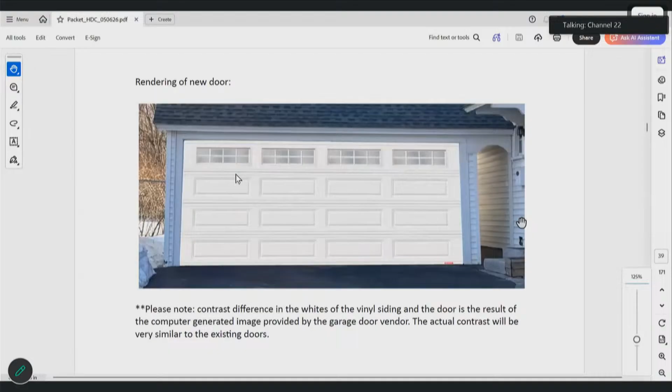Is there a motion to approve or deny? I'll make a motion to approve, get some conversation started. A second, please. Second. And discussion.

Well, I would say that it does look less historic with one long big door, but at the end of the day, it is a garage. So as much as I'm not crazy about the change, I think it's a less historic change. I'm going to accept and support the approval.

Yes, David. I don't have much of an opinion about overhead garage doors. They're a difficult thing, I've struggled for years trying to blend them into period buildings. But I think the repeated small window at the top gives this another character that moves it into another position. I'm wondering if they could just put 4 solid panels in each frame - without that, I think it would be plain. It would be missing the centerpiece, but I think painted out, it wouldn't bring you right to the focus of what that is. It's just a thought, trying to find a place.

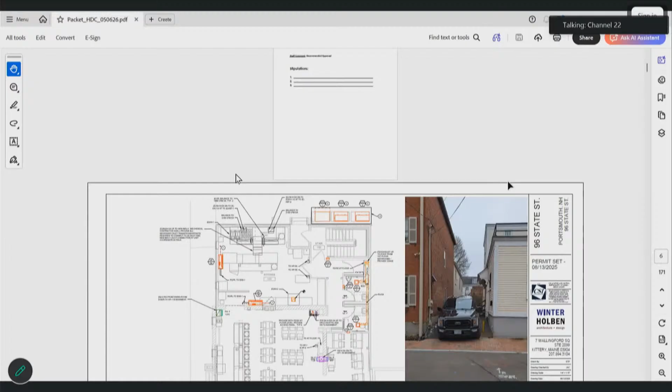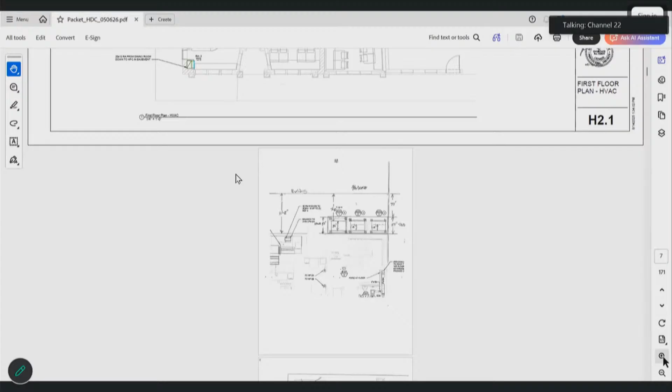We will start back at the top with item number 1, 96 State Street. The applicants are looking to install 3 exterior HVAC condensers on the building. The photo shown is the tight parking alleyway area where the condensers will be located, behind where the truck is standing and on the other side of the stair rails. They're located here in red, and there's also a schematic showing where those will be located and the sizing.

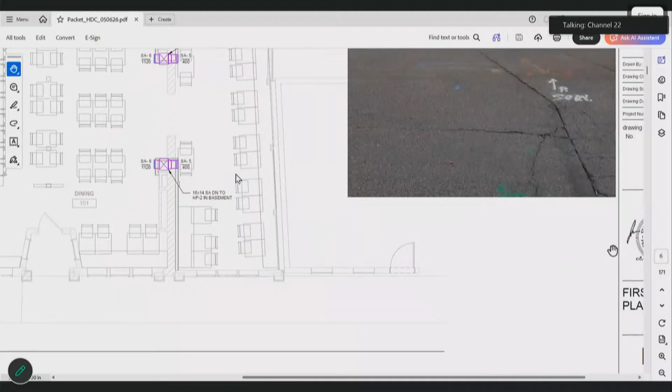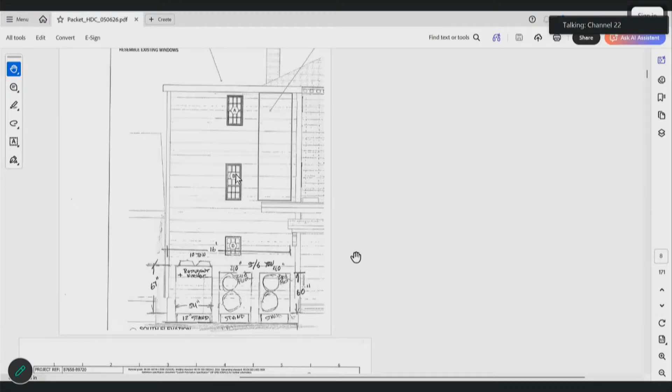I'm sorry, Isaac, I couldn't make heads or tails out of this schematic, could you go over it again? I walked around and couldn't figure it out. So if I'm looking at it correctly, from this photo where the railings are for this exit behind the bed of the truck, that would be the location for the 3 condensers on the snow stands. So behind the stairs? Exactly. I believe that's what we're looking at on this page. It does appear the line sets will run on the interior, with no exterior line sets shown. That's what I couldn't figure out, how it gets around the corner. Okay, that makes more sense.

Have they designated what type of screening they're going to use? They did not have screening proposed in this application. I'm not sure if the applicant is open to suggestions, or if we could stipulate that they use one of our standardized wood screening options. That could be a stipulation. Okay, any other questions on it?

We will move along to item number 2, 254 Newcastle Avenue. This project is here for the installation of an exterior condenser and exterior line sets. There were some questions from the commission last month, so I reached out to the applicant. We have a somewhat updated proposal from the HVAC company, and the applicant is here in case we have further questions. As noted, the condenser will be hidden at the rear of the home behind fencing, so that will not be visible from the street.

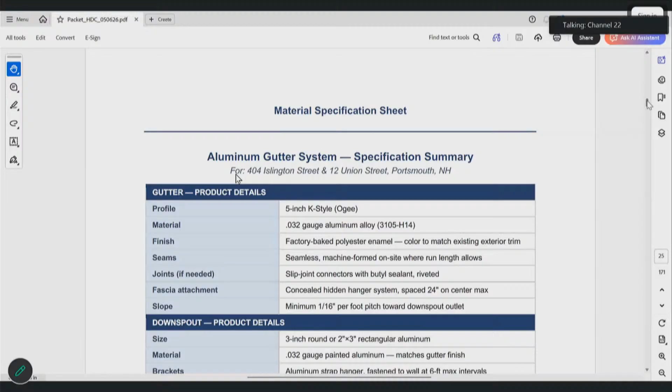My Photo 7, my guess is that it would be a similar style. I'm not sure if the applicant is here to confirm or deny. I will see if there's an actual spec here that might show that. It does say it would be replaced. The first page says this failed and is going to be replaced. So to answer your question, it would all match, it'd all be brand new.

I would just like to ask Isaac, do you remember if we approved the line sets for these condensers? Because unless I missed a meeting, I do not think I would have approved line sets like this for this building. Does anybody else have memory of this? And I certainly don't think we would have allowed it without telling them to paint the body of the house.

I don't recall line sets. I'm happy to look back and check the application materials from the recent past. And if that's something that we need to have the applicant come back for, even just to paint it to match, we can do that.

I'm not going to approve this. If we didn't approve these and this person went ahead and put these things in, I think we should hold up on approval of these gutters because they're proceeding in a way that they're not supposed to. I'm not saying I don't support the gutters, but I think we need to get this property back to proper procedure. Is there any representative from the property here?

Doesn't look like it. I'm not sure procedurally how we can hold it up, because the line set request is not part of this request. But it is something that Isaac can go back and research. Yes, absolutely.

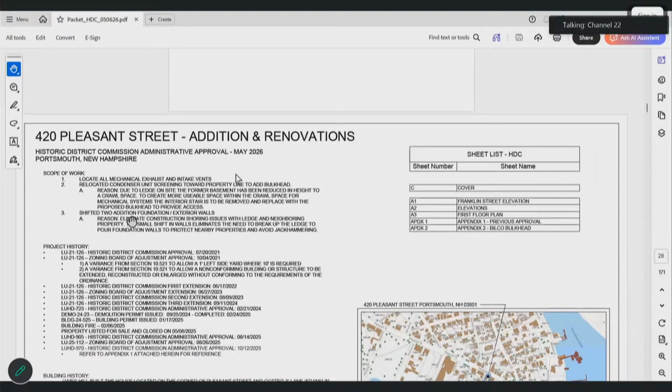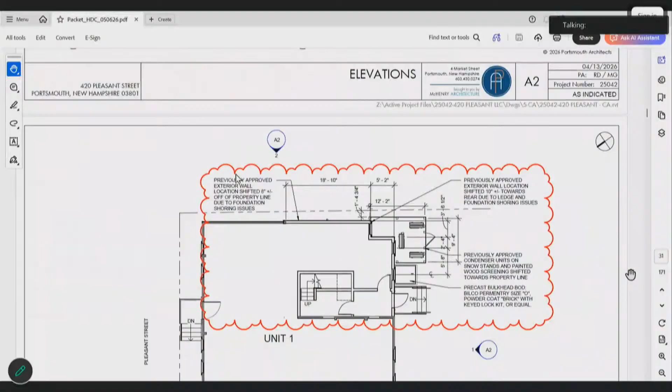They also had to shift the addition foundation exterior walls slightly, so we will see those minor changes. Here's some of the mechanical venting they will need, including some roof exhausts on the rear. This shows how the exterior foundation walls have slightly changed, where the bulkhead would be proposed, and the relocated condenser screening.

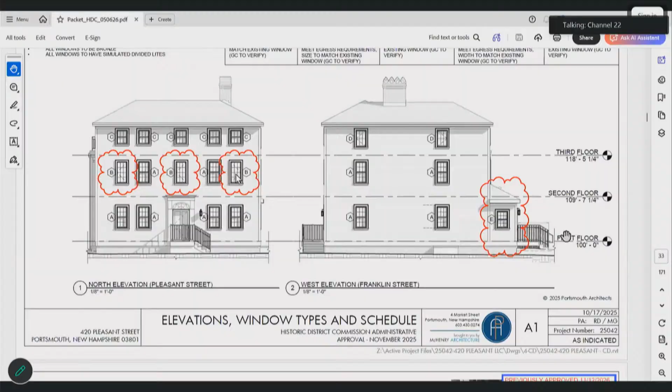We have our list of materials that have been coming along with this property, including the previously approved screening. They're just showing that it was already there, and they'll use that same style.

Just a quick question - it says previously approved November of this year. I think that might have been a typo, supposed to be 11/12 of 25. Not time traveling.

Any questions on these minor modifications and mechanical exhausts and vents? I have one I can't make work in my head - the Franklin Street elevation shows exhaust intake, which by itself is not an issue, but that's right where their electrical entrance runs. There's a pole very near there, and the wires run directly to the house and then drape down.

Are they going to have both there at the same place, or are they going to move the wires? That's something I don't know, and I don't know that they actually have to ask us about that. Just saying, it doesn't make sense - it's nicely centered between the windows, but I don't know that it makes sense. I don't think it's going to change anything otherwise. Okay, any other questions?

We will move along to item number 6, 235 Marcy Street. The applicant here was before us previously for a full renovation and addition project. The proposal this time would be to add solar panels to the roof and also snow guards.

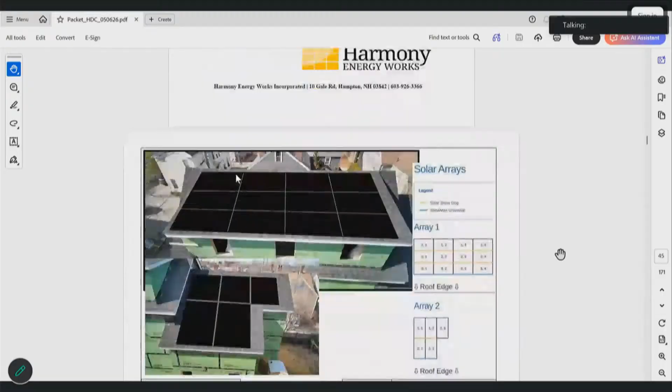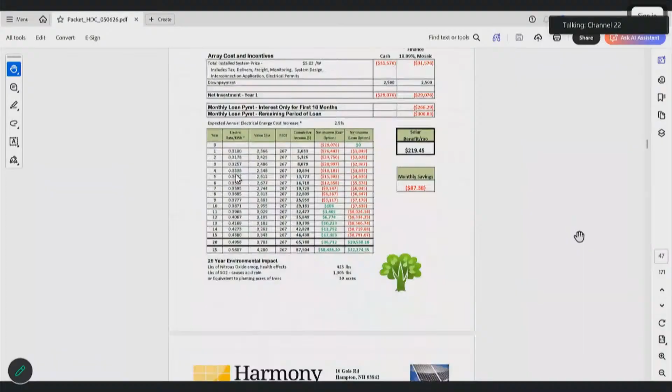As you can see, they would like to add solar to the top shed dormer and then onto the new rear addition roof line, covering the majority of that. Further down, we have some examples of what that would look like from more of a street view.

From the street, you would see a few panels on the lower rear addition from the back. The roof panels on the dormer on the 3rd floor would be very minimally visible - you would maybe see the edges, not a full panel. You would probably also barely notice the snow guards proposed here.

If need be, we can always stipulate that any conduit lines, electrical or mechanical, be run directly through into the house and not be exterior. Given the state of the house, that's probably a great thing to ask.

Any questions or concerns with this one? In the future, it'd be nice to have a view from the sidewalk, lower, because it's really hard to tell from this perspective. Sure, agreed.

The roof of the rear addition is clearly visible as you go past, and if you're walking slowly, you will have a clear view. If you're driving past, probably less so. So it's a little more than minimally visible, but not much. That's of course why it came to us for an admin approval - this did not meet our exemption.

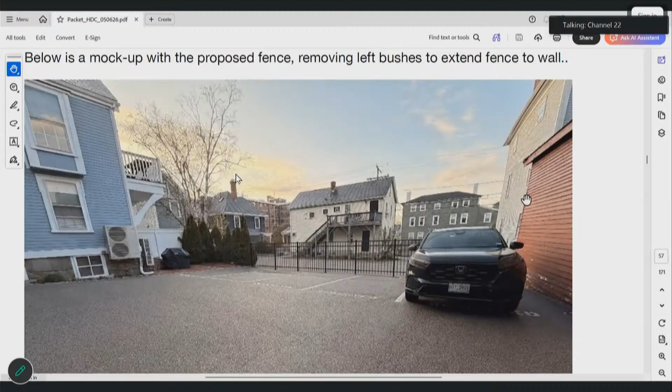We're getting some vagrant activity back there, and we also had a middle school fight scheduled back there a few weeks ago. They get out of school in the middle of the day on Wednesdays, and I came out to a full-on fight in the backyard. We've also had vagrant people crouch down and hide back there. It's the perfect place to not be seen by the police, and then they can run off if someone tells them to leave. If we have the fence up, there's no reason to go back there and try to cut through.

The fence will match the front fence as much as I can. We have a front gate that you can enter through for the driveway, and it always stays open. I believe that is original with the property, which was built in the early 1800s, anywhere from 1813 to 1825. So this will match that as much as possible.

The other properties that way don't need it because there's a house that works as a natural barrier, but all of the houses going towards Middle have fences in the back, very ugly fences. Ours will be beautiful.

Height? How tall do you want it? I'm going to check with the fence company, but I believe it has to be at least 5 feet. I don't want to go 6 feet unless I have to. I'm going to make sure there are no horizontal pieces anyone could get their foot in to climb. If the vertical pieces are no more than 4 inches apart, I'm told you can't get your foot in there to climb it, even if there are horizontal pieces along the vertical pieces.

And black, definitely black. With this type of fence, Isaac will probably remember the first awful rendering I sent, which was just a terrible continuation of the white fence. It looked really bad, even though it would probably be a lot cheaper. It looked terrible, so that's why I switched it to this.

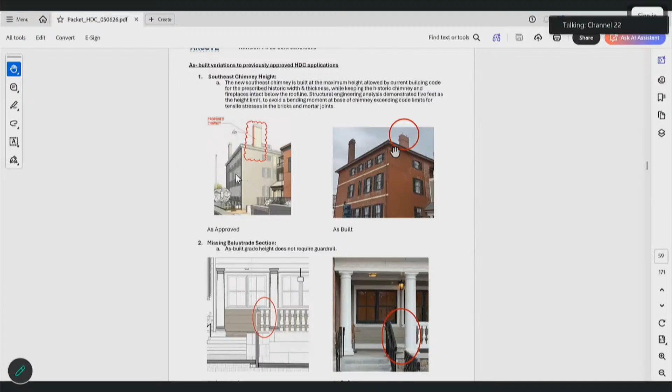There's a missing balustrade section, and shorter crown moldings on the porch and entablatures, and cap moldings over the window heads were omitted—we'll see those here. As you can see, the new chimney is quite a bit shorter, again due to the height restriction on chimneys. I believe the applicant is here; if anyone has further questions on the building or inspection side, they might be able to answer why those height restrictions are in place now.

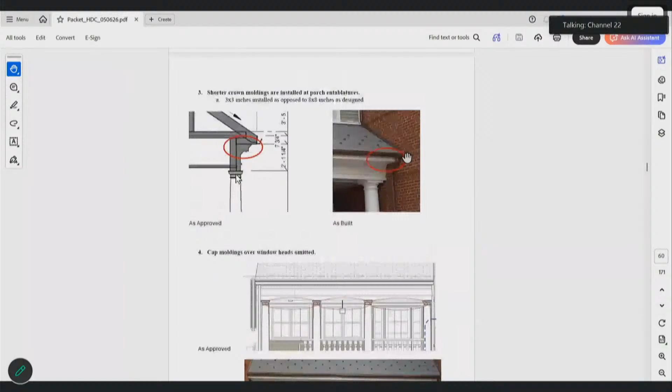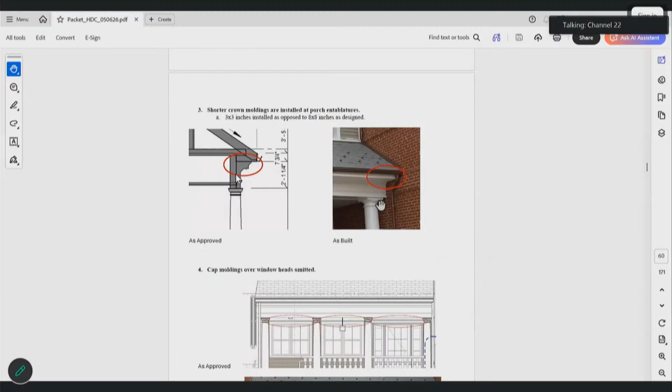As you can see here, this was the previously approved balustrade section. The as-built is missing just that one tiny section from the railing over to the column. This graphic shows that the shorter crown moldings were installed at the porch and entablatures, as mentioned, calling out the previously approved versus the as-built, and similarly with the cap moldings over the window heads that were omitted.

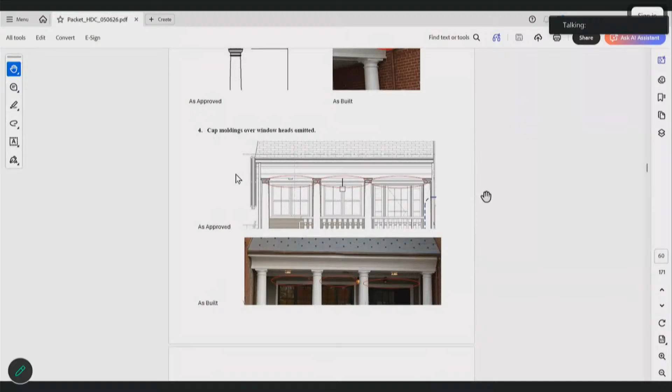So we are approving the omissions. Yeah.

Any specific questions on any of those individual items or with this application as a whole?

Just wanted to thank Tracy for how well she lays things out for us to see. Thank you.

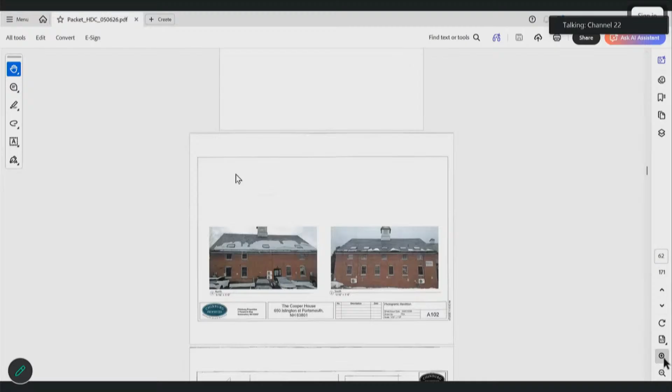Okay, with that we will move right along to item number 9, which is 650 Islington Street, Unit C2. The proposal here is for exterior HVAC equipment, multiple condensers, exterior condensers. You can see here on the plan, they show a total of 4 condensers.

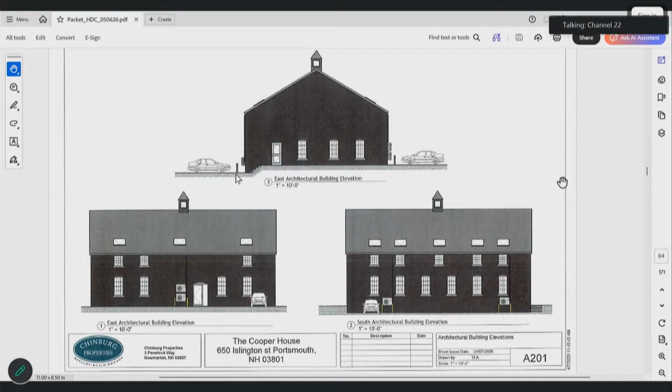These will be on snow stands, it looks like, and will be visible from the parking lot area. If you're driving by, you might not notice it so much with cars parked there, but certainly if you're walking around the building, these will be noticeable. It looks like they are proposing vertical exterior line sets. They are very difficult to see, my apologies, but you can see there's a vertical line running from each of the 3 condenser spots, running straight up to the 2nd floor level.

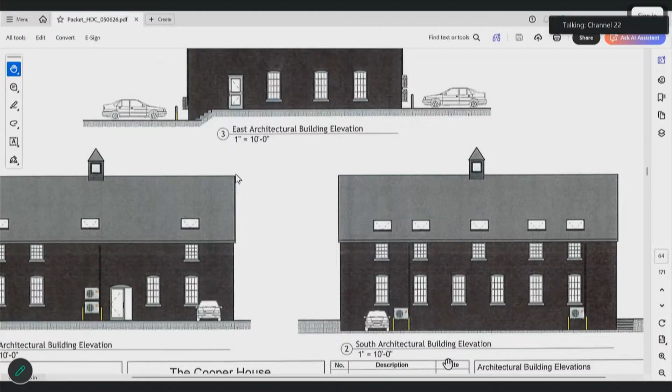My assumption is, based on the coloring, that they would be open to painting it to match the brick as much as possible. Are they proposing any screening? Screening was not part of this application. I would think that they would be open to screening options. We can always stipulate one of our wood screening options if that's appropriate. Even if the wood is painted a brick color or something, I don't know if it's too much.

Is there anyone here to speak to this property? I would love to know if the proximity to the parking spaces is going to be a problem with putting screening in there. Well, it looks like there might be some sort of parking balustrades, or at least they might show that that's where cars can park up to, so they may have room to do that.

We can stipulate that if they can't do that for that reason, then they can come back to us.

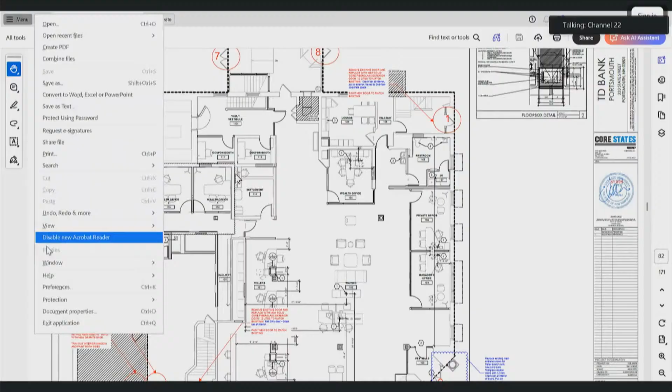Is there anyone here for this application? Hi, please come introduce yourself. Good evening, my name is Thomas Michael. I am Senior Manager of Development in New England for TD Bank. Great, welcome, thank you. Isaac can put up your application on the screen, and if you would like to take us through what you'd like to do.

As the board probably is aware, we've had somewhat of a continual renovation going on in this building for the past, I'll say, 3 years. It's kind of like an old sweater, pull a thread, and we're finding additional things.

The application tonight is for the replacement of our exterior doors and the removal. The application says removal of 4 doors and converting to a window. I think it's only 2. The person who submitted the application did note there were some minor revisions on this iteration.

So the reason this is coming up now, we've done renovation of our retail space and added some other additional spaces. Through those renovations, we've identified that we want to upgrade our security system on the building. Part of that is the doors, which are very old wooden doors, kind of worn out, and they don't close well. So we want to replace them with composite doors, similar looking, similar color, similar window style, so that they have a secure closing and our alarm system won't falsely trigger.

Okay. Is that it? Do you want to scroll through and see which ones we're talking about? It looks, so—

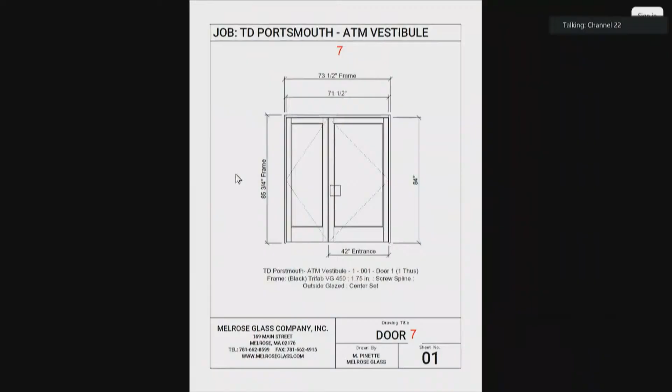And then if you go back, I think door 8 is on the parking lot. Yeah, that door is non-functioning, doesn't serve a purpose, so we're proposing to take it out and put a bank of windows in that match the windows to the left.

Okay, so that's not what is in the application, so this is why it's very confusing. I don't know if you got any updates from them? I might have misspoke. Door 8, if this is door 8, I'm not sure the numbering of the doors in the application. That door is being replaced in kind.

Similar style, similar look. Okay, so for door 7 and 8 in this application, it looks like you want to replace them with metal frame doors and full light, so that's why it's not what you're presenting. I think our architect was proposing full light versus half light. I think that was a big discussion we had back and forth. So we might have received a previous design. So it sounds like—

All the current doors will be replaced in kind, matching design, but maybe not all wood. They will not be wood. They'll be a composite door, so we don't have the degradation issues we have now. Right, okay.

Are there any other questions? Do you have cut sheets of these composite doors, Christian, do we? We have shop drawings of the two back doors we just spoke about, but not in this presentation. Not in this presentation, no. Okay.

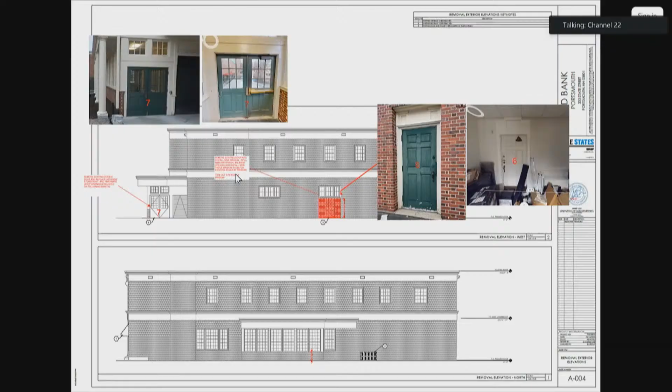All right, are there any other questions about this? Yeah, let me get Larry. Just a couple comments. One on the door material, because at one point we mentioned wood, composite, aluminum.

I think at the end of the day, you are a bank, so you have to go with whatever makes you most secure in your assessment. But I do have a question here back on door 8, because the rendition - I think it's on sheet 03 - are you going to replace that with a full light door with no dividing?

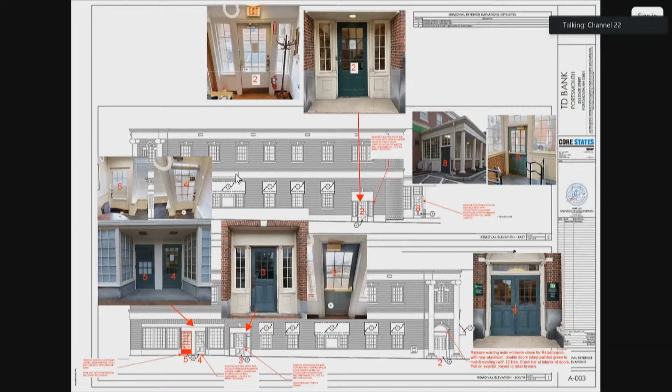If I look at the page labeled sheet 03 - door 8 you're referring to? Yeah. So the original proposal was to make those 2 doors a storefront system with a full light, glass light with top and bottom rails. As drawn. But if that's not acceptable, then the alternative to replicate that door is also feasible and doable. So what I'm looking at on sheet 03, is it a solid metal door? Is it a glass door?

What is it on? It's the sheet right above, if you scroll up, not down. It's the next page up. That one? So that's a glass door - that inset is all glass, tempered glass. Top, bottom, and sides is aluminum. Okay, yeah, I wasn't sure, thanks. Like a storefront door you'd see in another building.

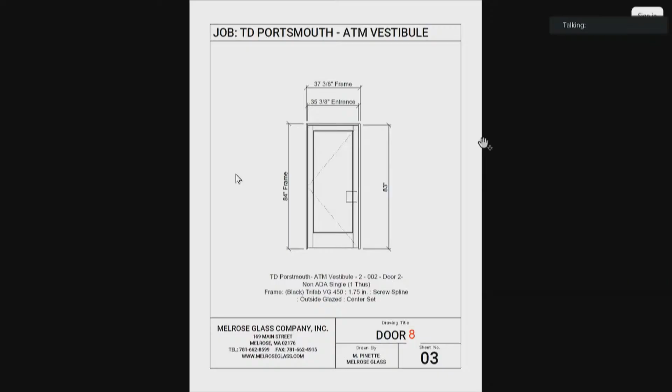And I guess my other question - I know you have to come back for the doors and the material and how it's going to look - is there anything that can be partially approved for, like filling in the brick, or do they have to wait to come back for everything? I mean, we could give them partial approval for infilling that, sure.

So can I go back to that? So you are proposing to put this in? That was the original proposal, but I think at the end of the day, if it's not acceptable, the alternative is the other doors - to replace in kind. That's essentially what I'm hearing in comments - we're not proposing a full glass door anymore. Okay, if that's not going to fly, then that answers the question, and we'll proceed alternatively. Thank you. All right, are there any other questions here?

I think we pinned it down. I think we would like to see something more closer to what you currently have. So we can either postpone the whole thing to next month until you have those materials to present to us, and then it should be an easy discussion and vote. Or if you need partial approval of the infilled door, we can vote on that tonight. We just need to see the materials and cut sheets for what you're proposing.

Let's just hold the whole application off. Okay, it's not going to make a difference. The windows are a little quicker than the doors. Okay, all right, but thank you. We'll get you the information we need.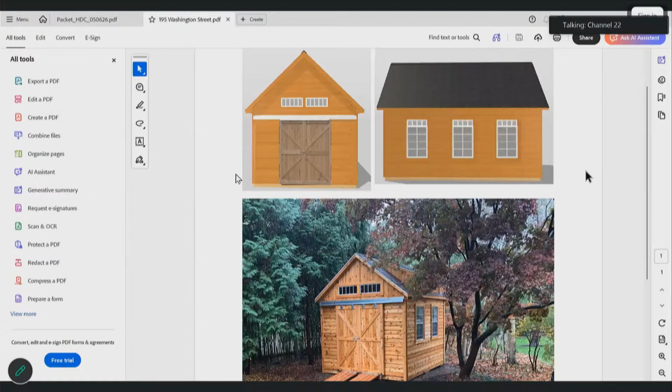We didn't forget the walls in our package. I don't know if you've got dimensions on there. Were they just in the email itself? Yeah. Oh, okay, all right.

Does anyone have any other questions? Do we need to see the dimensions now, or is it acceptable to have them on file and know it's going to match the existing footprint? I think if it's replacing the present structure, we don't need them. If the doors or those sliding doors are 7 foot or 6'8", I have a sense of the scale of this thing.

Any other comments or questions? We know the floor is going to be the same. Is the height the same? As long as that's stipulated. I put that on the dimensions in the application as well, exactly the same, the 10 by 16 and 10 by 9.

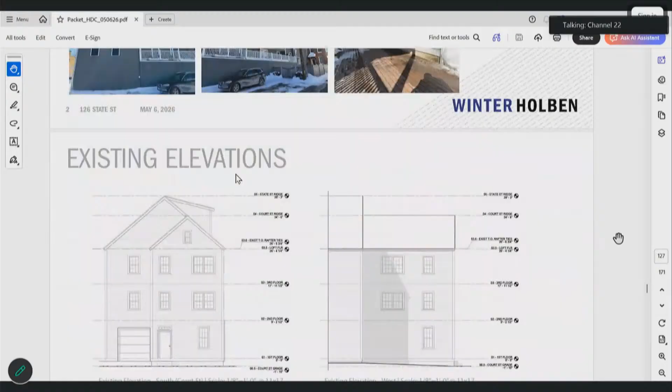You can see the existing L that extends out, and that was one of the things we noticed - the fascia that just keeps going all the way out there. We really wanted to break that roof line, and took that as an opportunity to twist this gable, really steepen that roof, which gives you the ability to create the extra space they're looking for, while also solving some of the issues with the existing building as it was built, maybe 20-ish years ago or so.

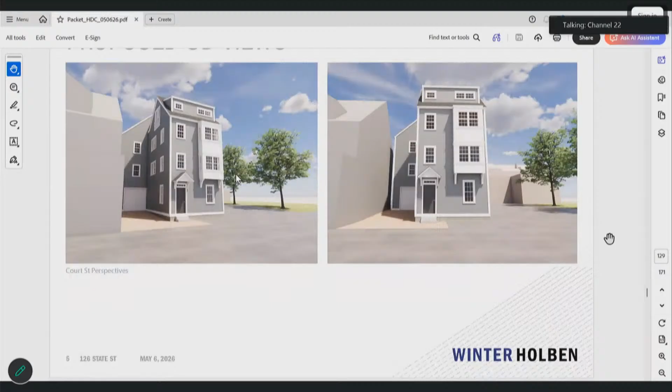Moving on to page 5, we started the proposed 3D views. This is the rotated gable. We steepened the roof pitch up to a 12-12 for the primary roof, which gives you more visibility, more of the roof wrapping around it, a little more visible from the street front presence.

We simplified the third floor windows, removed those transoms, shortened that up with the dropping of that eave line, and anchored the bay off of that, which I think is going to be a nice clean detail there.

We had a more modern balcony on the opposite side, but we brought around more of a Juliet style balcony over the driveway side to give them their escape opening and some fresh air and daylight into that new bedroom space upstairs.

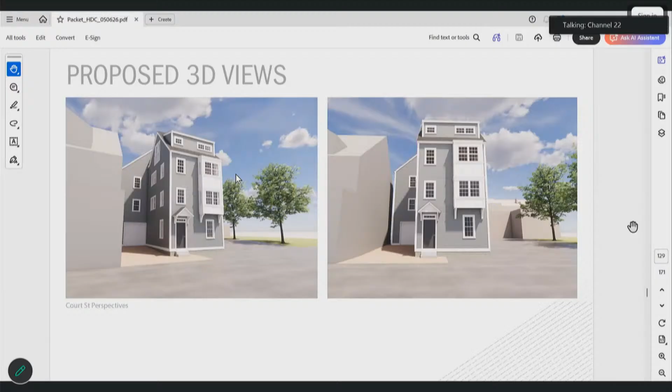We went with the 1-2 stacked pattern that was going on with the building, and continued that going up with the projecting window bay, but then adding windows on the side of the window bay as well, which lightens that up and creates more views through it. The dormer is also stacking that window pattern as we go up. You can see the slender windows on the side of the window bay here, giving a little more lightness and airiness to the projecting window bay.

Page 6 starts to show the side looking down from Court Street. Again, with fleshing out that wall where we're on the property line, we created another faux window detail up in the gable of the new addition at the top.

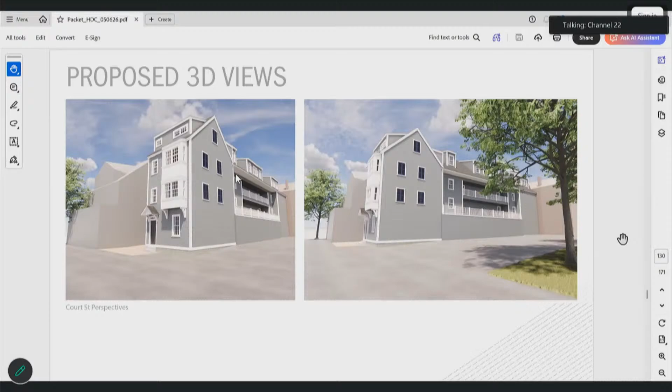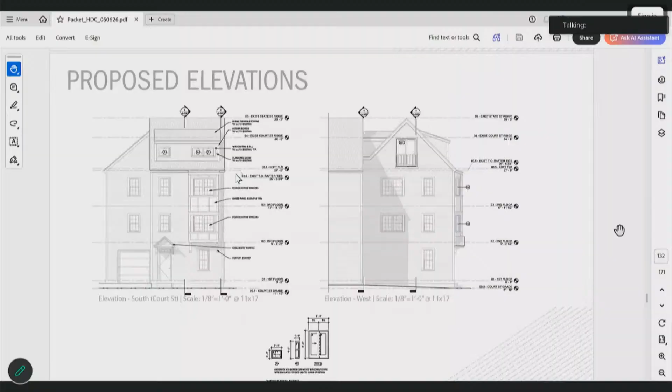Then here we have the scaled elevations on page 8, looking at it from Court Street, as well as the driveway elevation from the west, and the opposing property on the east.

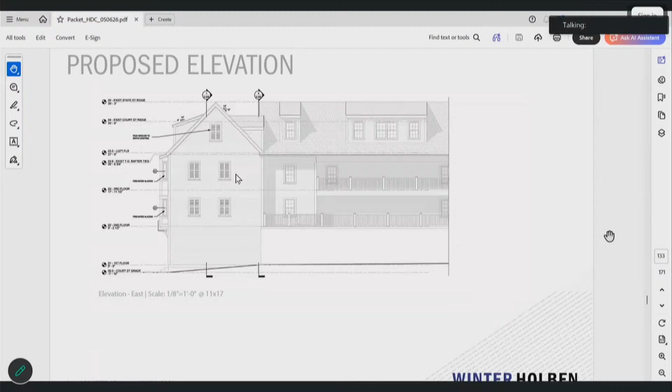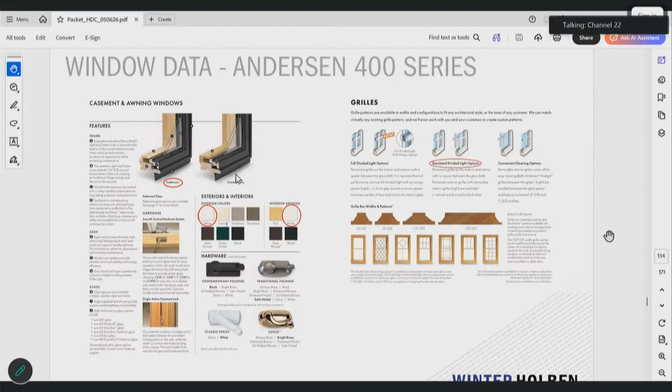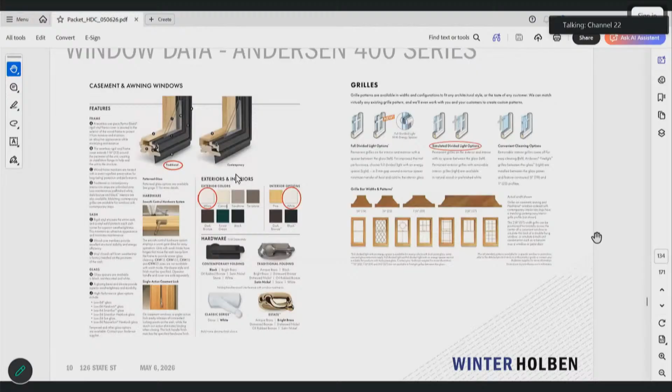We submitted - we're setting up for the next meeting - but we submitted some of the window data, and we selected the Andersen 400 Series with their, so we're matching this window that is there, which is a clad wood window. It's a simulated divided light, but it does have the light block in it. That's what we're proposing, which is what Andersen calls their full divided light. Even though it's listed as simulated, we'll correct that - it'll be the full divided light with the light spacer. Usually when I think of full divided light, it's a true divided light, which they have two options within that.

That's a white exterior as well there, to match what's there. But that's basically the intent, to match and even reuse some of the ones that are in good shape.

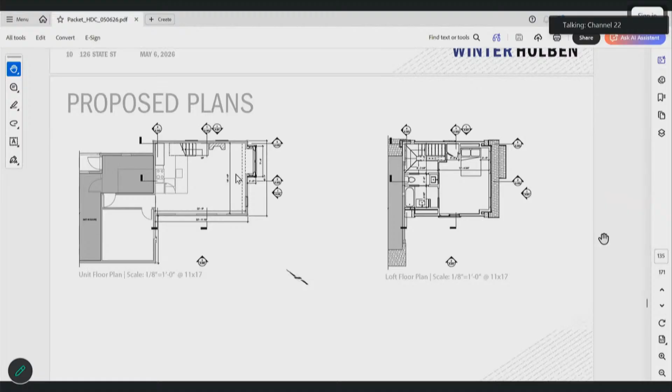Showing floor plans, so you have the expanded kitchen on the ground floor and the stair up to the loft floor plan with the new bathroom up there and the bedroom space. You've got some sections on page 12, just different cuts showing some of the complexities of the space, but able to work it all out.

And we did introduce sort of a winder stair at the top there to get the headroom to work, and it could be a great little project here. That's the end of the presentation.

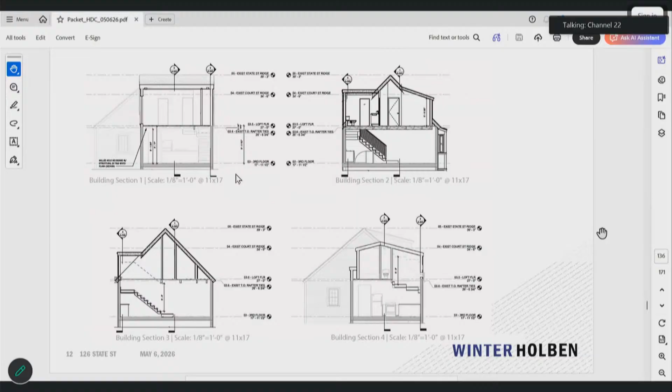If you have any questions, any discussion? Page 9 - tell me about the thing between you and the other unit at the roof line. We see it from the side. Someday we'll get a view from the next door neighbor's side, but tell me what that is. Is that a cover for a staircase? Yes, so it's a dormer in the back, and it's gabled, shedding off to the sides, and it's shown on the roof plan as well.

Oh yeah, we'll get that in there, we'll get the roof in the bottom right-hand corner of page 12. Sure, yeah, there's the cut through that section of it. So we get the ridge hitting the existing roof in the back there, so that's what we centered it on.

Okay, I don't know that this is where we're headed, but just to say, I'm pleased that there aren't holes in the sidewall like there had been in the previous round. I'm comfortable with much of what I see here. I do like the theme of putting a termination on this long building. All works for me. The two-story bay, I think, could get details in a more convincing way for me. But that seems awkward, that lump over the stairs, and I need to get convinced that that's the thing we should be doing. But other than that, I'm kind of much more excited about this than I was last time.

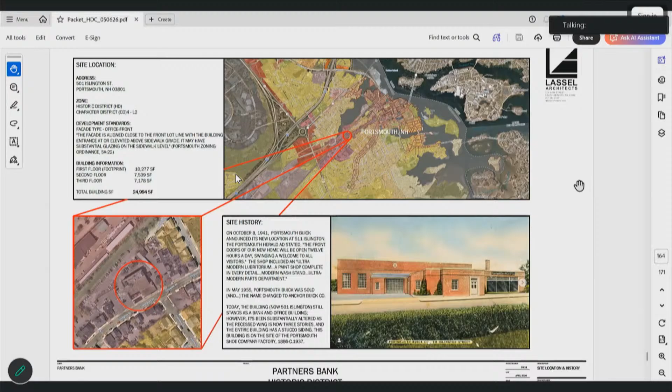So the next page are the existing site photos, and you can even see the little patches here. So again, EIFS was installed, we believe, sometime in the 90s over the existing brick that you saw in the rendering before. So we were able to confirm the areas where we have existing brick and where we don't have existing brick.

Because it was a car workshop, there are large openings that we don't have brick, and they've infilled that with wood wall framing. And that's where you see kind of all these windows, and there's kind of this awkward recess between the windows.

And so what we are proposing to do is to remove all of the EIFS and expose as much brick as we can. Through our exploratory reports, we're finding that the condition of the existing brick behind is actually not all that great.

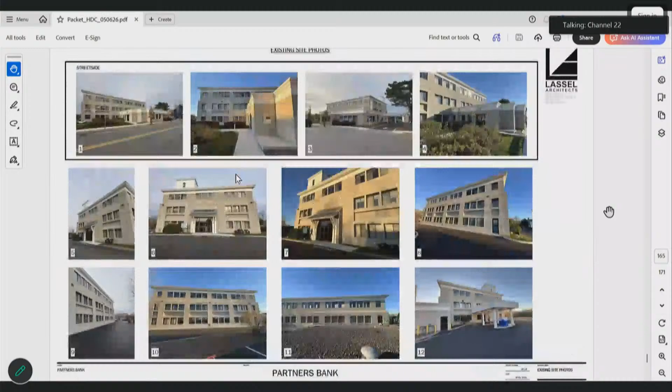It's been patched in a lot of places, but because of the adhesive that they use for the EIFS, it's really hard. You know, they've tried sandblasting it and using different solutions to try to pull that off, and so it's proving to be a little bit challenging in terms of trying to restore that existing brick.

We're also not quite sure what we're going to find when we pull that off. So it is 3 layers thick, and we're not sure what they did for moisture management.

And so part of what we would love to talk to you tonight about is the idea of pulling off all the EIFS and then maybe introducing some rigid insulation along the exterior, and then facing what we're showing as brick with a thin set brick veneer, so that we still have that appearance of brick.

And especially in keeping with the areas where we have existing brick, we would like to maintain that. So we'd love to chat with you about that as an option.

And then where we have the wood framing in between, we're proposing that we would clad that in a Hardie panel and paint it a darker color, similar to a storefront system that you'd see down in, not storefront in terms of like aluminum storefront, but what you would see in kind of downtown Portsmouth, where you have the wood paneling, your doors, your larger windows, and kind of a painted wood application, and then the brick would be on these piers here, and trying to maintain as much brick as we can along this one-story piece where the bank branch exists.

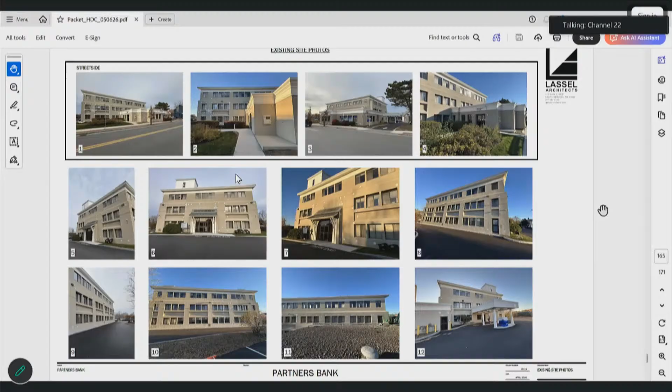Part of the proposal is also new windows, so replacing the awful slider windows that are in there right now with what we're proposing is a fiberglass, the Pella Impervia line, and introducing some grills into those windows as well, just to be more consistent with other buildings nearby.

So this first page is the view that you see from Islington Street. The next page is the view that if you're standing kind of with your back to Dunkin' Donuts, looking at the main entry point to the building.

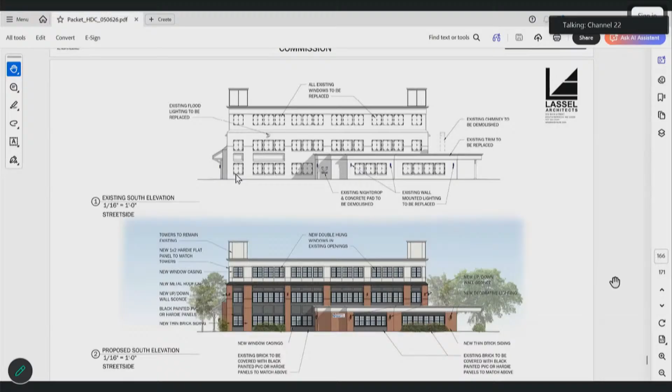So we would retain, this is an existing canopy that has some copper detailing on it, and we would retain that, just kind of repair in kind. And we're also looking to replace the wall pack light units that they have with kind of an up-down sconce, just to kind of wash those brick piers.

One other thing to point out is at some point a third story was added, and that actually steps in, so there's the kind of brick base of the existing building, and then they have the wood frame kind of set within that, and then they have a steel structure within that this third floor was kind of placed on top of.

And so this third floor, we're proposing to also just have a Hardie panel system here, replace the windows, but look at it as kind of a lighter piece, so it kind of goes away, and the brick portion really reads as a two-story piece. And then we are proposing just a metal roof covering to help with the kind of stepping in of that third story.

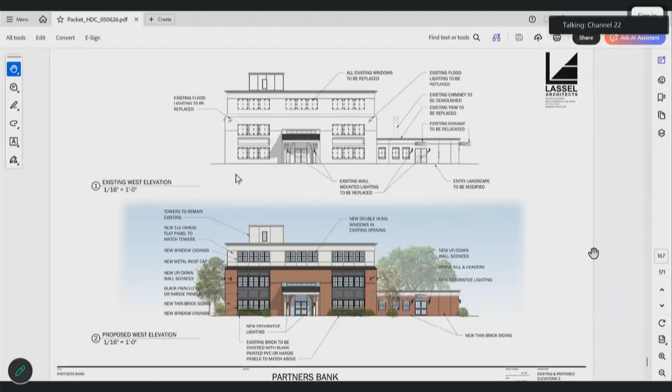This next page is the backside - if your back's to the train tracks, this is what you would see. And then this last elevation is the drive-through side, so as you're coming down Islington, leaving town towards the west end, that's the elevation you see.

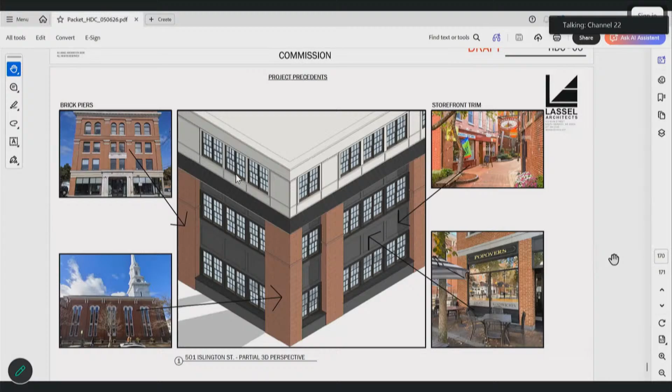The next page has some precedent images for what we're proposing with this idea of retaining the brick piers. We do have some existing brick still in the middle of some of these piers, but it's so sporadic that it would take a lot of effort to repair and infill additional brick. So we're looking at these as brick piers as the structure, and the whole piece in between as the infill piece. We have some precedent images there.

The second to last page, we're proposing a thin set brick veneer. It is real brick, just cut thinly so we can apply it to the face of, hopefully, a zip R sheathing. That way we can get some insulative properties, a new air barrier, and address water drainage from the existing brick on the inside. So those are all things we're talking through with our team and contractors.

And we're proposing the Pella Impervia fiberglass windows. We would be doing black on the first two levels and then transitioning to white on the third floor.

And then the last page, which I think was part of your submission - I can share it with you. Cheyenne, with a little help from AI, was able to very quickly generate a 3D perspective. We have some other copies too, so I'm happy to pass it around, just to give you a quick idea.

You just said the third floor has white windows, but all the photos, drawings, and renderings show black on the third floor. That is true - the intention was for it to be white, so it might just be how it's shown on our elevations. It might be such small detail that it shows as black, like heavy lines. But our intention would be to match the color of the trim on the third floor, so it's not a stark contrast. It's a minor question, but it's just inconsistent. Good catch, thank you - we'll be more clear about that.